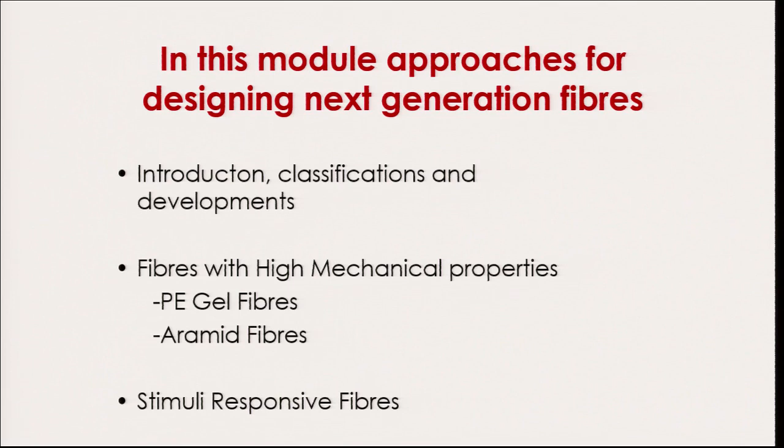In the last part of this module, I will be talking about stimuli responsive fibers, and very particularly, temperature responsive textile fibers. The first part of the module deals with the introduction, classification, and basic definitions and developments.

As all of you know, the initial natural or commodity fibers in textile were cotton, wool and silk. These fibers have a very special aesthetic feel.

Later on, synthetic fibers such as nylon, polyester and acrylic were developed. All these fibers are known as first generation fibers.

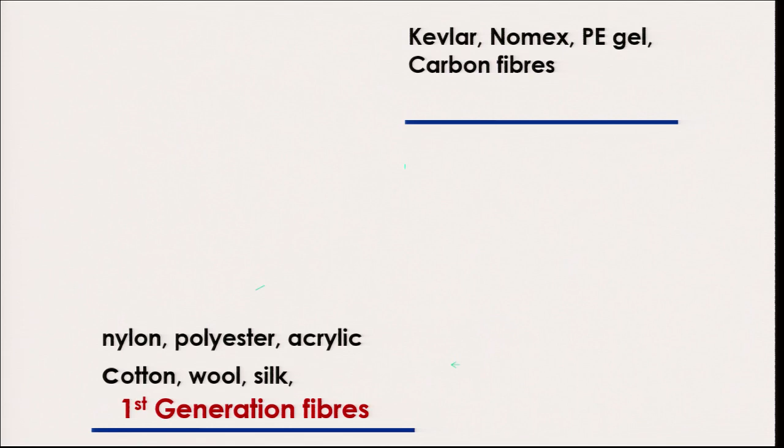Cotton, wool and silk have relatively poor tensile strength and modulus, but nylon and polyester fiber can be made with a maximum GPD of about 10, and these can be used for various industrial applications.

But almost 100 years ago, when these nylon and polyester kind of synthetic fibers were not available, it was cotton, wool and silk themselves that were used for these kinds of industrial applications.

Today, we have another category of fibers which have much higher strength and modulus compared to these first generation fibers. These are second generation fibers, and in this category we have Kevlar, Nomex, PE gel fiber and carbon fiber, etc.

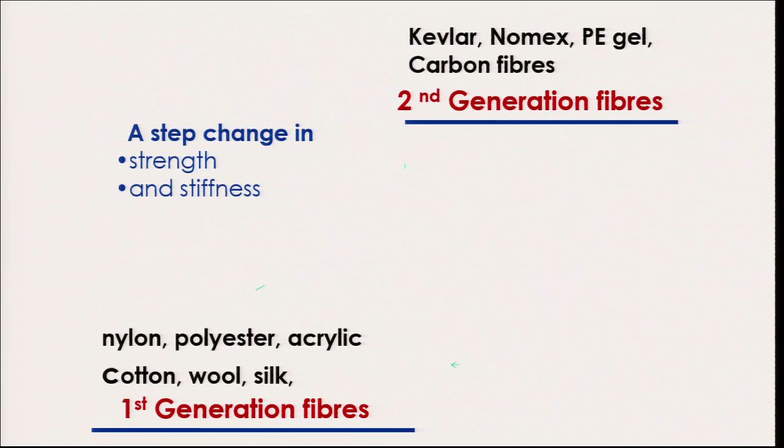These fibers have very high mechanical properties, and they are not used for apparel kind of applications, but they are used for other structural applications.

If we compare the properties of first generation and second generation fibers on this graph, on the x axis I have the strength based on volume, that is in GPa, and on the y axis I have plotted the strength based upon the weight.

If you see over here, steel, which is a metallic fiber with a very high density, has got much less strength with respect to weight.

On the other hand, if you look at high performance polyethylene, which is an organic, polymeric material, it has much lower density. Therefore, it has very high strength both based on weight as well as on volume.

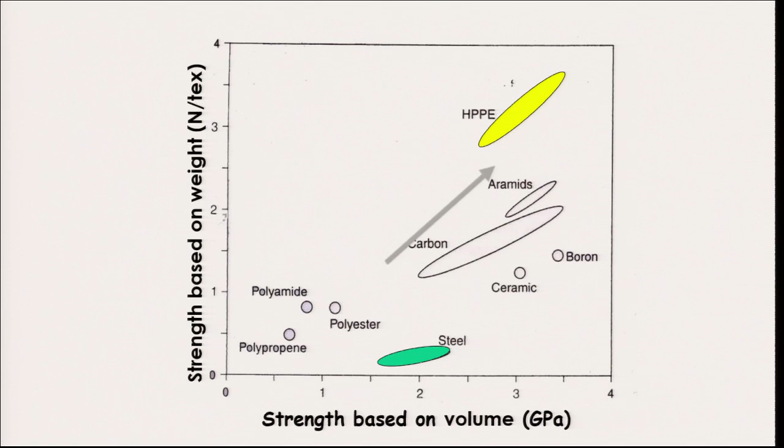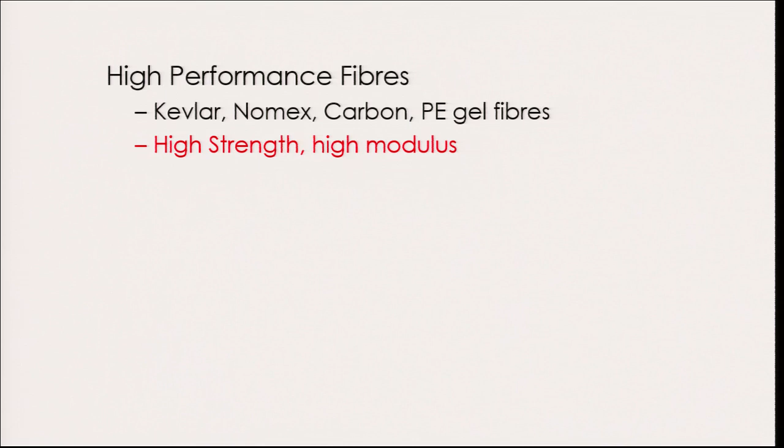If we are moving from commodity materials to these high performance materials, the strength increases substantially. Materials like Kevlar, Nomex, carbon and PE gel fibers, because of their high mechanical properties, that is high strength as well as very high modulus.

They are used for applications in aerospace, in ropes, for making bulletproof jackets. They are also used for making superior civil structures.

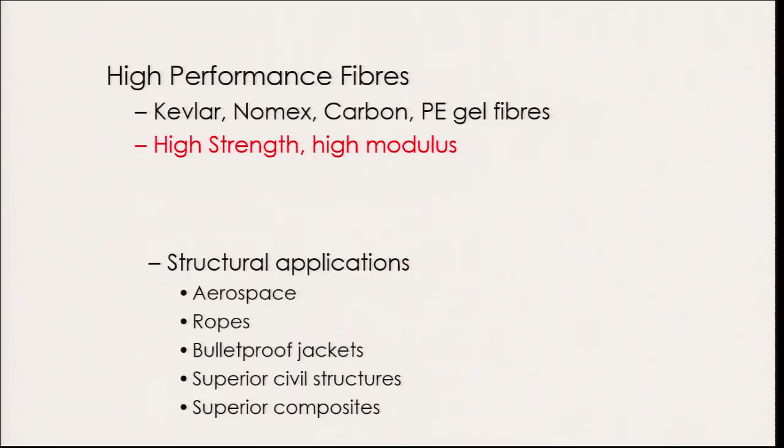They can also be used for making composites with epoxy as well as thermosets and thermoplastics, and some examples of these high strength materials are used in very high performance composites for various applications.

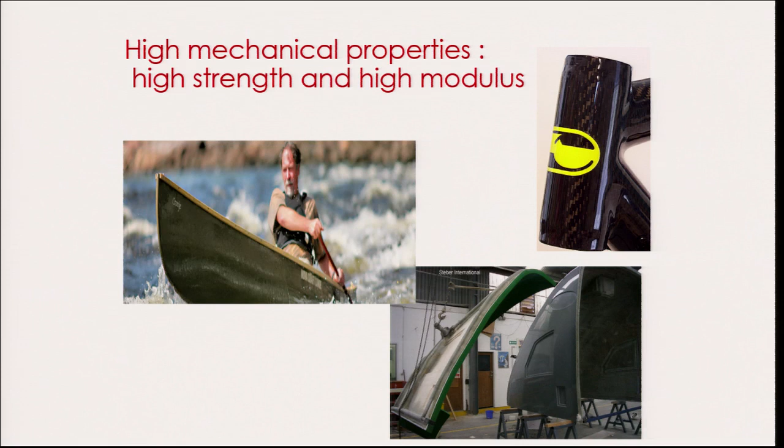They can be used for technical textiles, that is for mooring and towing ropes, sailcloth, etc.

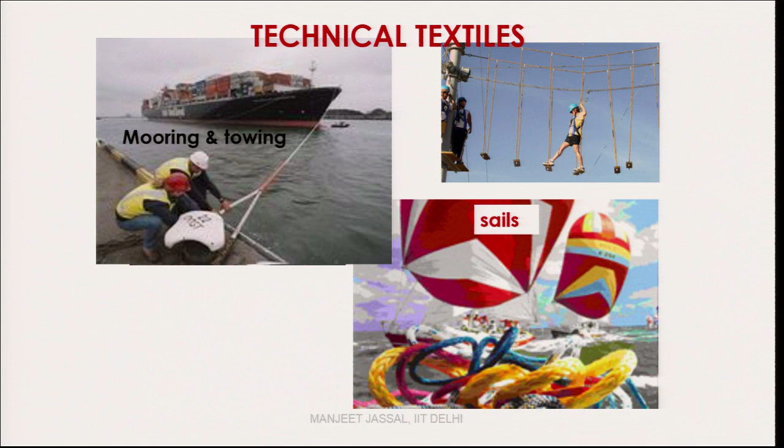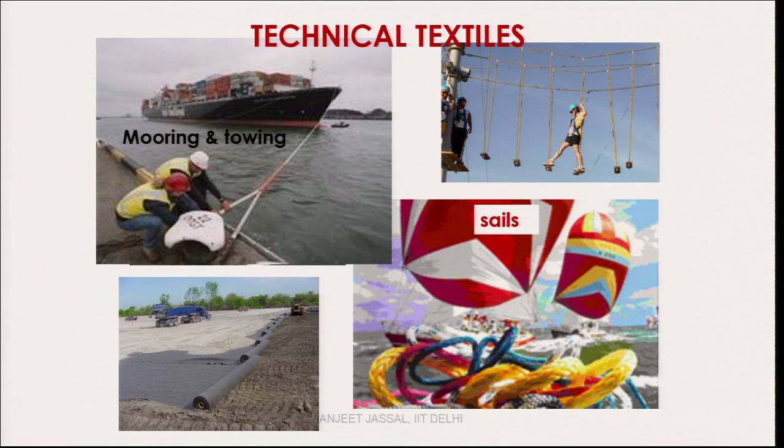They can also be used as geotextiles, for laying a polymeric layer or a film under roads to enhance their performance properties. Besides these, many of these materials are also used in protective textiles.

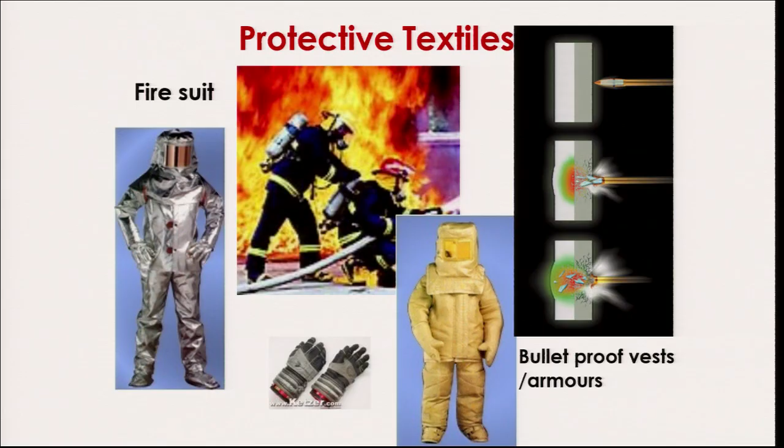That is protection against fire, that is a flame retardant material. It can be protection against bullets, so bulletproof vests or armors are also made. It can also be used for making cut resistant apparels, gloves, etc.

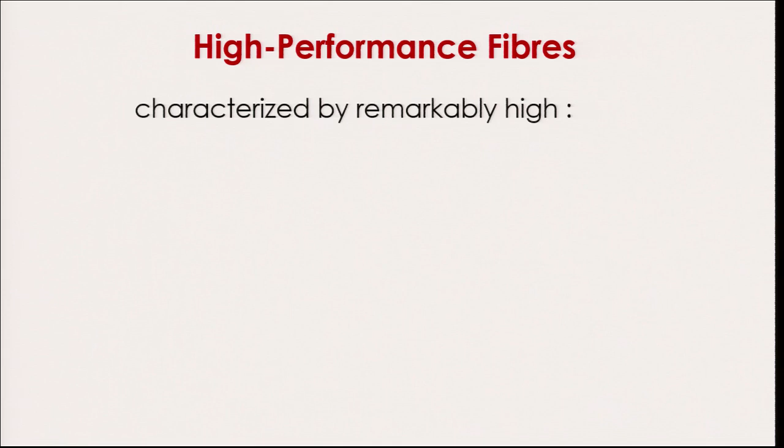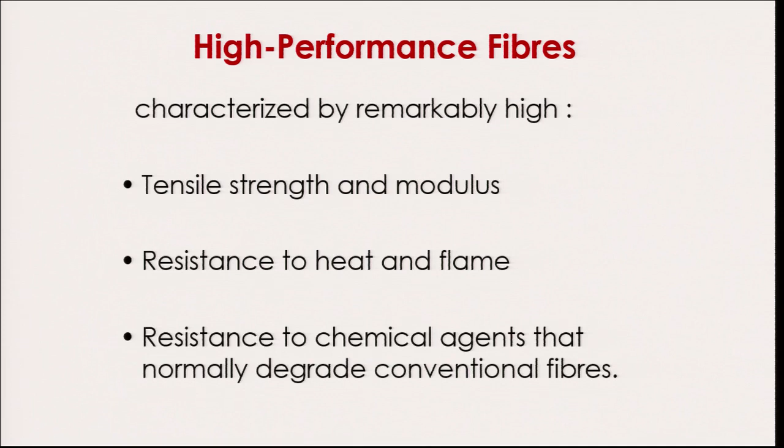The high performance fibers are generally characterized by either high strength and modulus, or high resistance to heat and flame, and the third category is high resistance to chemical agents which normally degrade conventional fibers.

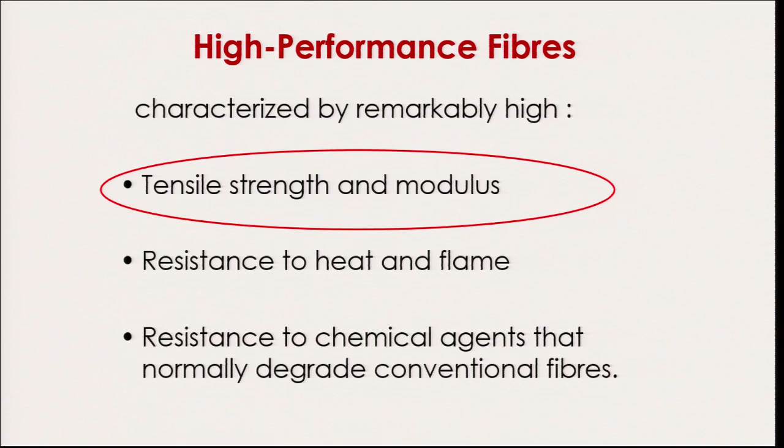But in this particular module, I am going to basically talk about materials which have high mechanical properties. And many of these materials which have high mechanical properties also have high resistance to heat and flame.

The first question that arises is, what are the factors which determine the strength of a fiber? When designing a high mechanical property material, I must understand these factors.

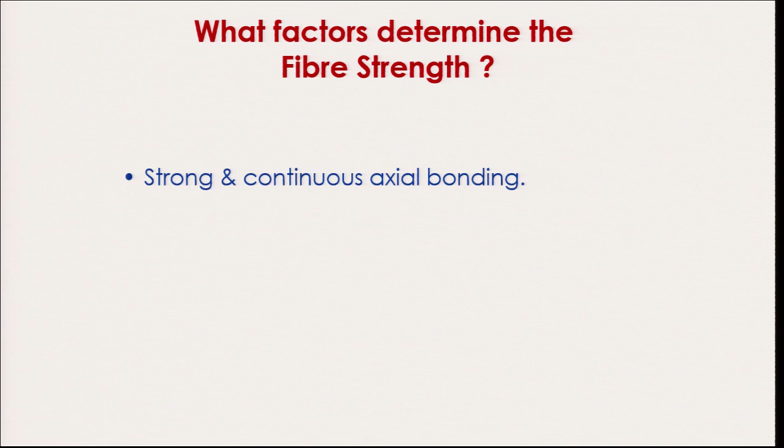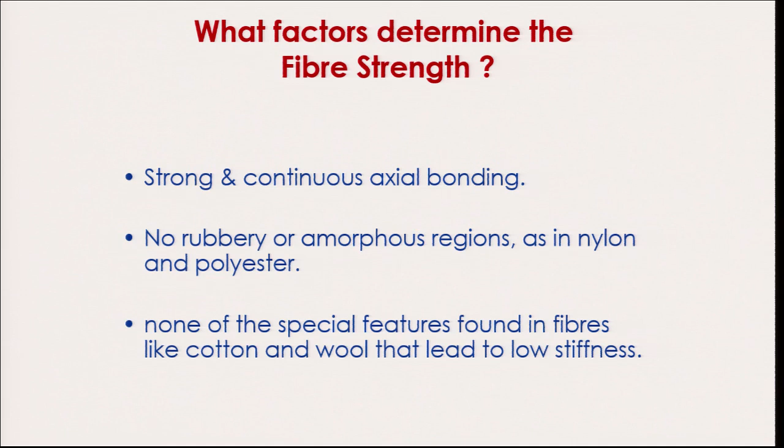First, it should have strong and continuous bonding in the axial direction. It should not have rubbery regions or defects in the system, like normal polyester and nylon fibers. Third, and most important, none of the special features like convolutions, which are present in cotton, should be there, as they lead to low stiffness or lower modulus values.

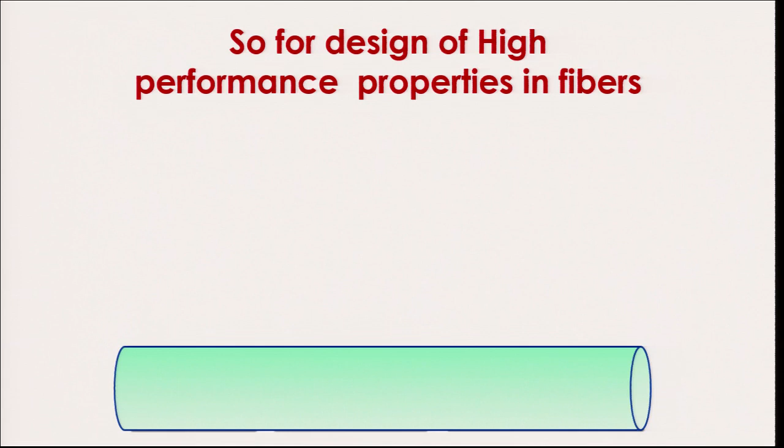For designing high performance properties in these fibers, we should have polymer chains with extended chain conformation, with strong chemical bonding in the main chain. Also, if polymer chains have small cross-sectional area, it would be possible to pack more chains in that small area, meaning more polymer chains can bear or share the load, leading to enhanced mechanical properties.

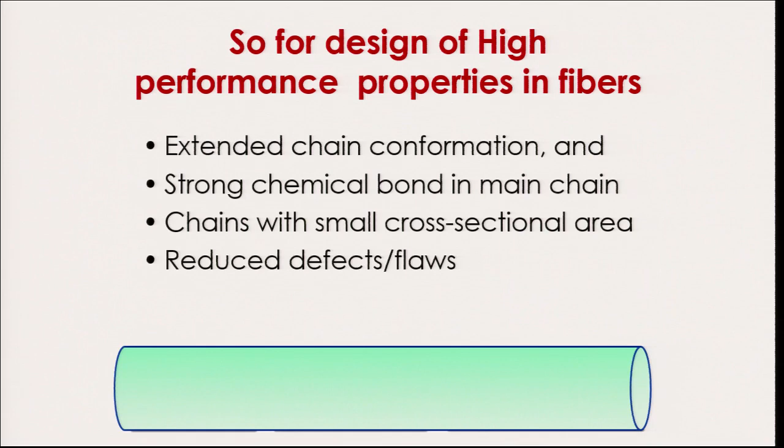Last but not least, there should be reduced defects or flaws. When I say defects or flaws, what does that mean? It means there can be rubbery regions, impurities, or chain end kind of defects. We should avoid such defects.

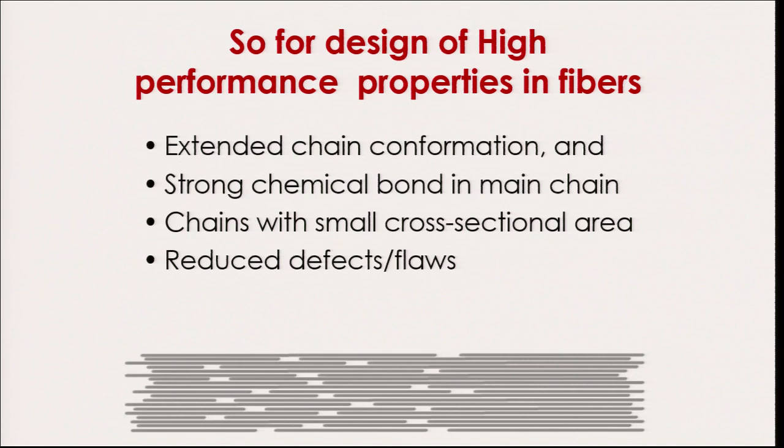As per Staudinger, a polymeric fiber structure which has polymer chains in highly extended form with very high molecular weight and highly oriented along the fiber axis, with minimum defects, is likely to result in high mechanical properties. This is the basic philosophy for designing high mechanical properties in high performance fibers, which we are going to discuss.

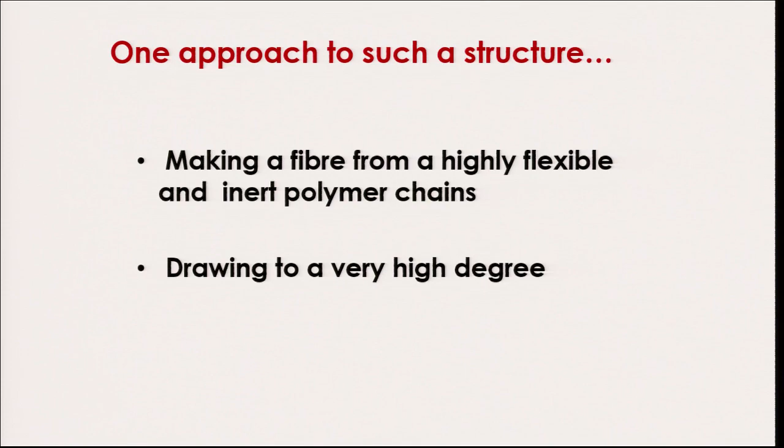This can be achieved by two different approaches. The first approach is using a polymer which is highly flexible, meaning it can be easily drawn and extended along the fiber direction. This means using the ease of pulling the material, drawing and extending it in the direction of the fiber axis.

This is possible because if the material is highly flexible and inert, without interaction with side chains or interchain interaction, then super drawing will be possible. On this basis, I will be discussing PE gel fibers in one of the parts, which is based on this very approach.

The second approach for achieving the same thing is totally opposite, contradictory to this. In this approach, we actually use intrinsically rigid, interactive polymer chains. I've underlined intrinsically rigid interactive chain. That means by nature the polymer structure is rigid, having rigid units like aromatic structures, heterocyclics, or fused rings.

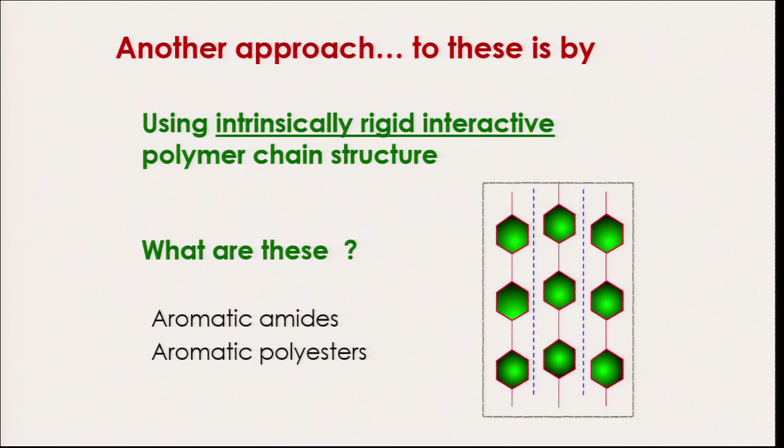Many of these also have interaction between different chains, meaning they have strong interchain interaction and are intrinsically rigid. This is the approach generally used for making fibers like Kevlar, Nomex, etc., that is rigid rod fibrous materials, which we will take up in the third part of my module.

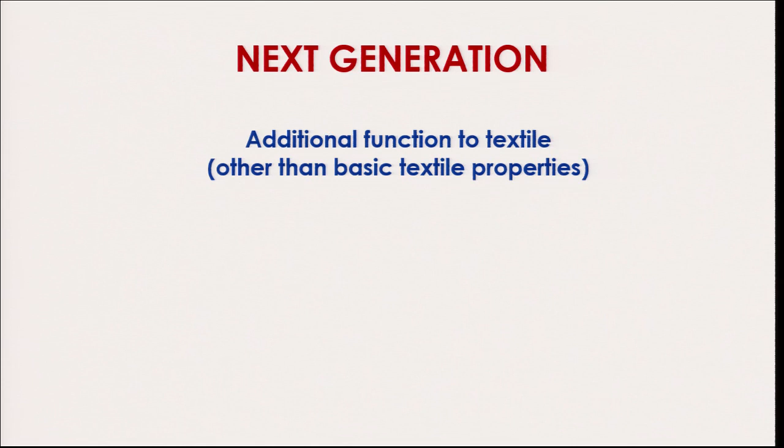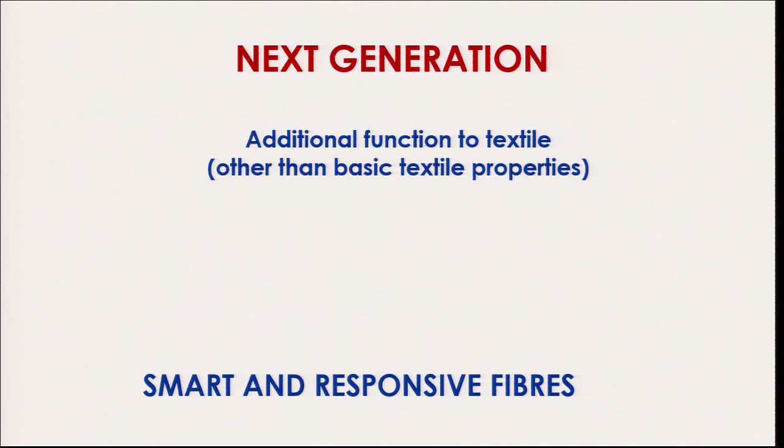Besides having high performance properties, these days textiles are required to be useful for additional functions, other than their basic textile properties. In the next generation, textiles are also required to be smart and responsive, meaning fibers that can respond to environmental changes such as temperature, pH, etc.

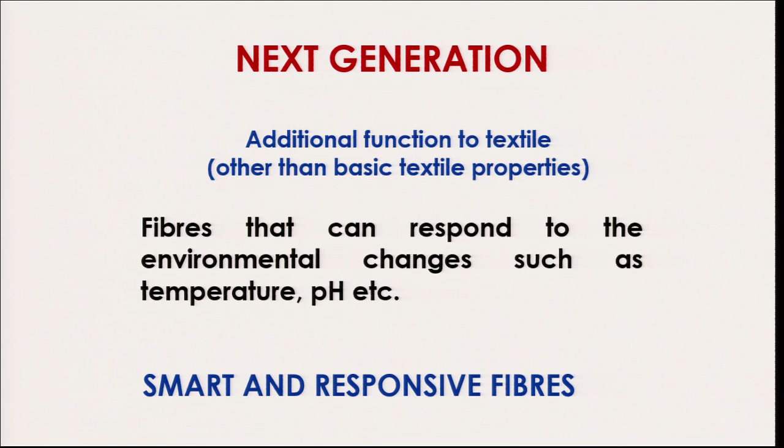Not only should they respond to that stimuli, but also judge the extent of stimuli and adapt accordingly. Materials like these can be used for various sensing applications. In the last part of this module, I will be talking specifically about stimuli sensitive polymers which respond to temperature based stimuli, and we will discuss them in detail.

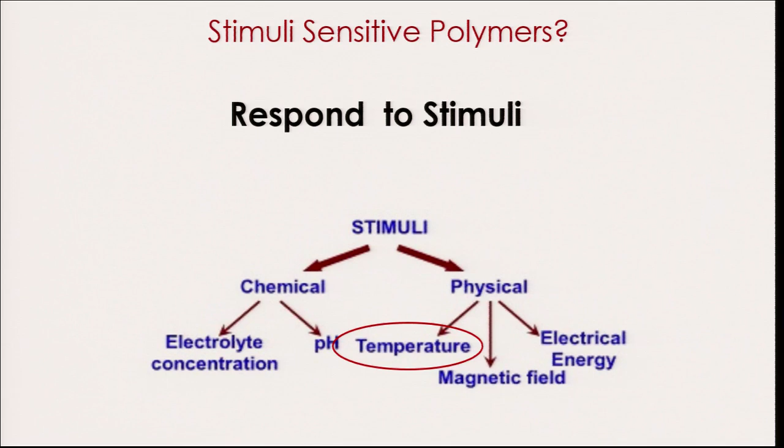Typically, stimuli sensitive polymers can respond to physical stimuli like temperature, electrical energy, magnetic field, etc. You can also design polymers which respond to chemical nature of the environment, meaning electrolyte concentration or pH of the medium. But I am going to take an example of temperature responsive polymers and discuss strategies to make fibers from them, suitable for various sensing applications.

In the next part of the module, I will be talking about PE gel fibers, that is the first approach for making high mechanical properties materials. Thank you.